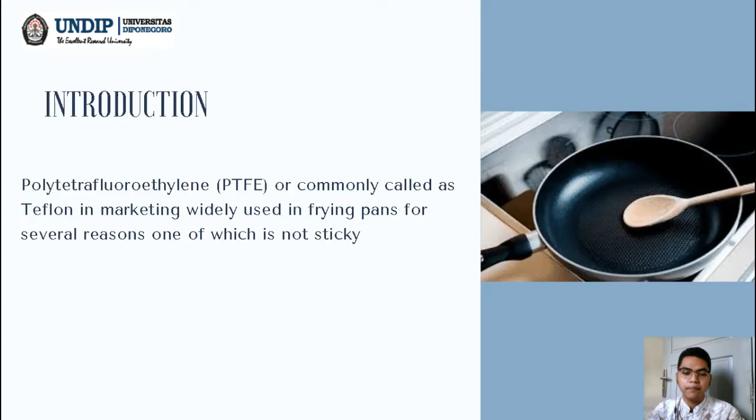The first, introduction. Polytetrafluoroethylene (PTFE), or commonly called Teflon in marketing, is widely used in frying pans for several reasons, one of which is not sticky. We always talk about Teflon frying pan, Teflon. Did we know what Teflon exactly is?

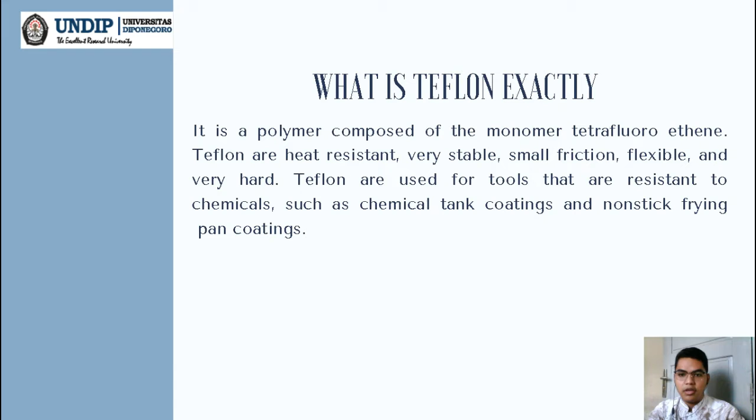Teflon is a polymer composed of the monomer tetrafluoroethene. Teflon is heat resistant, very stable, small friction, flexible, and very hard. Teflon is used for tools that are resistant to chemicals, such as chemical tank coatings and non-stick frying pan coating.

There are many parts of a frying pan: long handle, aluminum base, and then Teflon non-stick. With all of that part, which part could be Teflon? Teflon on the frying pan is used on the surface of the frying pan that is in contact with the food. Basically, Teflon is used as a coating for the basic material of a frying pan, so that it doesn't stick with the food when used.

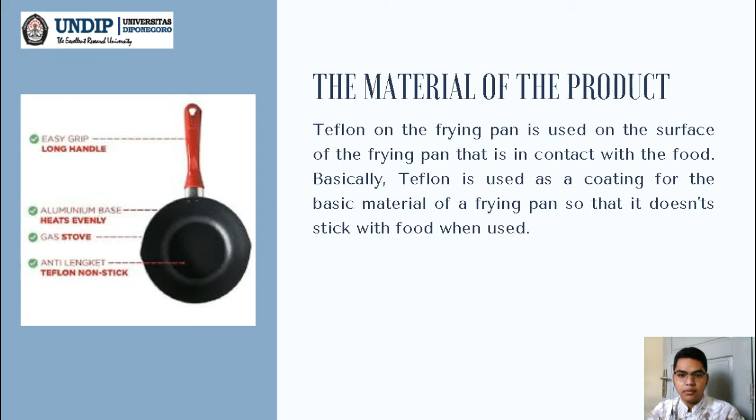Why is Teflon used as a frying pan coating? We can look at the material properties of Teflon. There are several material properties, but I only discuss mechanical properties and thermal properties. The data of material properties and thermal properties I took from MatWeb. MatWeb is a web that provides material properties data.

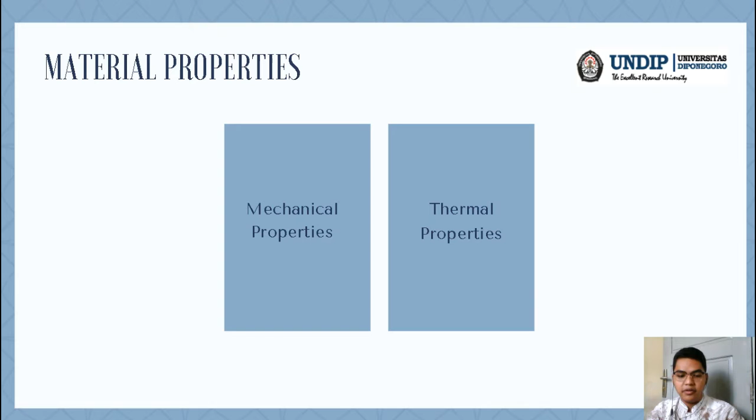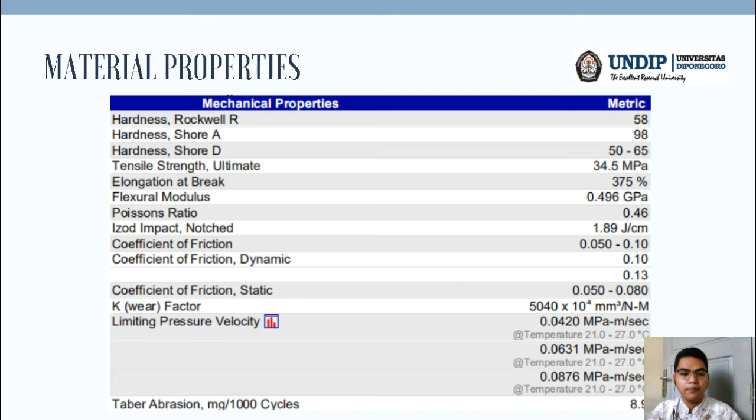First, mechanical properties. There are Rockwell R hardness, Shore A hardness, Shore D hardness, ultimate tensile strength, elongation at break, flexural modulus, Poisson ratio, Izod impact, coefficient of friction dynamic, coefficient of friction static, K wear factor, limiting pressure velocity, and then Taber abrasion.

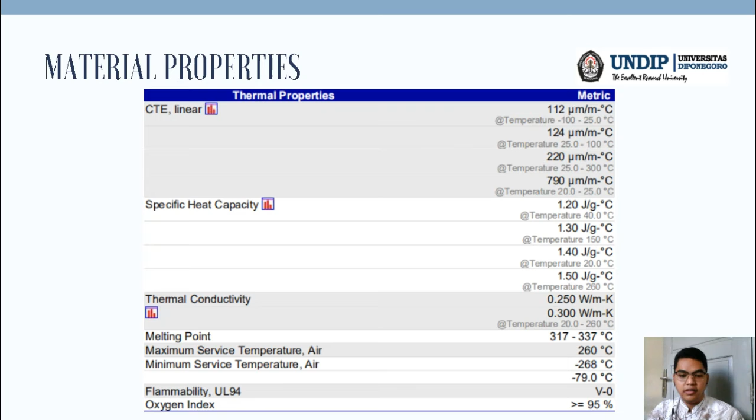And then thermal properties. Why did I choose to discuss thermal properties too? Because frying pan Teflon is used to cook, so thermal properties are important to discuss. The thermal properties are coefficient of thermal expansion linear, specific heat capacity, thermal conductivity, melting point. The Teflon melting point is about 317 until 337 degrees Celsius. Minimum service temperature, maximum service temperature, flammability, and oxygen index.

How to make the materials. Before we know how to make the material, we should know the basic material of Teflon. The basic material of Teflon or polytetrafluoroethylene (PTFE) is a solid fluorocarbon because the molecular weight of the compound consists entirely of carbon and fluorine. Both water and water-containing substances, or oil and oil-containing substances, are repelled by PTFE, as fluorocarbons show reduced London dispersion force due to the high electronegativity of fluorine. PTFE has one of the lowest coefficients of friction of any solid.

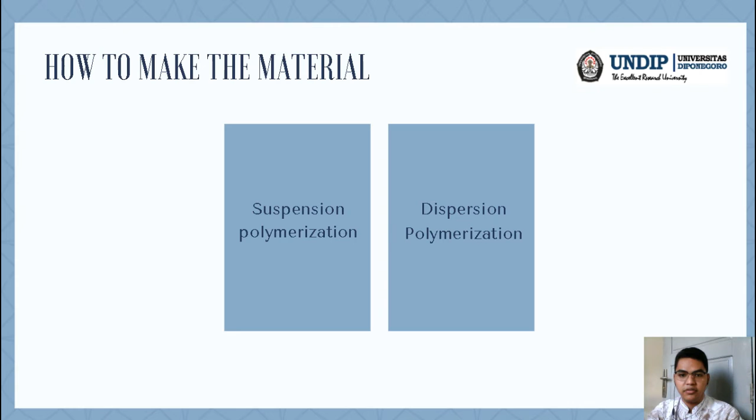After we know the basic material of Teflon, now we can know how to make the material. There are two ways to make Teflon: the first is suspension polymerization, and then dispersion polymerization. In suspension polymerization, the TFE is polymerized in water, resulting in grains of PTFE. The PTFE grains stick together, forming small pellets. However, PTFE may be sold in bulk already pre-molded into so-called billets, which are solid cylinders of PTFE.

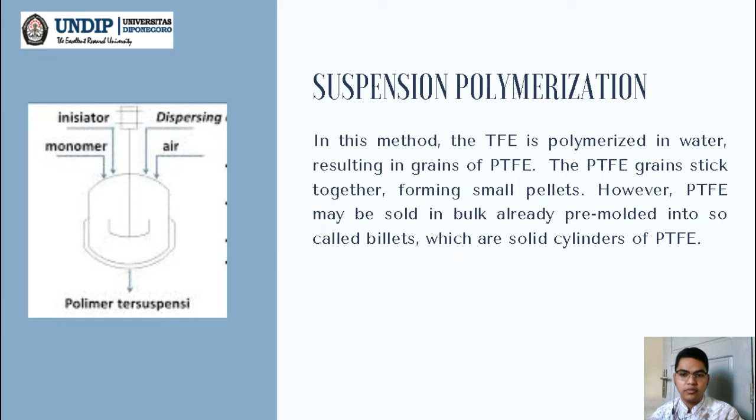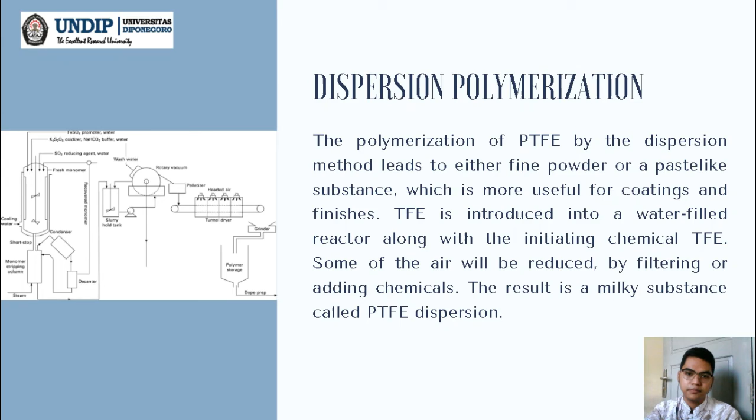After all we discussed before, we should know the advantages and disadvantages of using a Teflon frying pan to cook. The first is we discuss the advantages. The advantage of using a Teflon frying pan is it's not sticky when cooking. This is the most important reason why we use the Teflon frying pan. When we cook something, it will not stick between the frying pan and the food.

The second advantage is reducing the use of cooking oil or high-fat margarine. The third is it's easy to clean the equipment after use, because Teflon has properties that make it not sticky when we use it, so we can clean the equipment easily. That is the advantages.

The disadvantages of using Teflon: it is easy to scratch and peel off when we use it to cook something. This peeled layer, when mixed with food, is very dangerous because the Teflon is scratched and peeled off, and it mixes with the food. It is very dangerous.